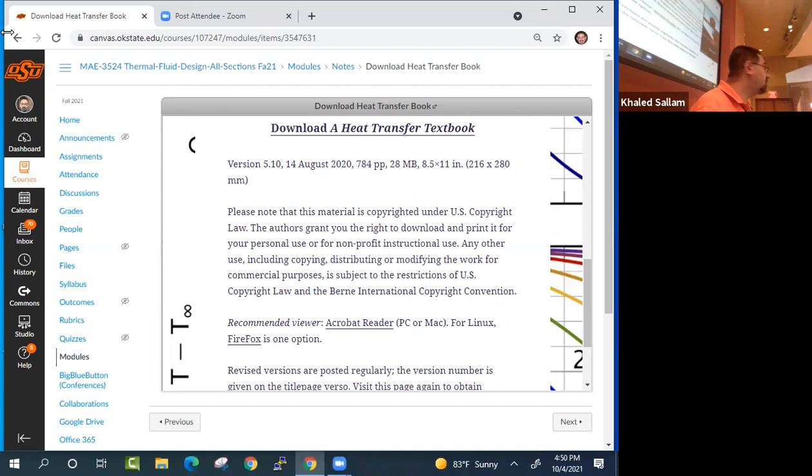If you just click here, you can download the whole book. It's an excellent book, but we only need chapter 3, which is heat exchanger design. And on top of the actual textbook, they have the solutions to all 43 problems in chapter 3, the heat exchanger chapter, all uploaded for you.

So between this and the PowerPoint, which is mainly based on Dr. Ghajar's book, the one you got in heat transfer, by Dr. Afshin Ghajar, correct? Between those 3 things, we are in good shape. You don't really need any heat transfer book. Does this make sense? Yes.

So let's start with the introduction to heat transfer. Okay, so that would be chapter 1 and 2 in this book, chapter 1 and 2 in the MIT book, and basically the first 9 chapters in the heat transfer book. So the whole 9 chapters in the heat transfer book are really an introduction for how to pick a heat exchanger.

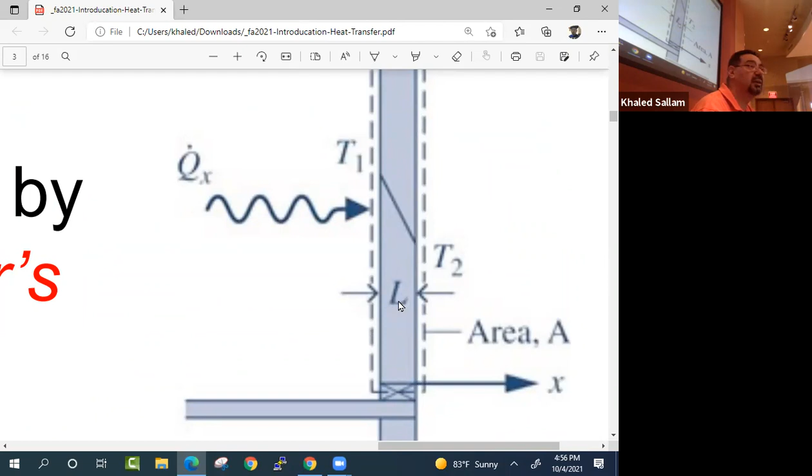It basically follows Fourier's law, which says that the heat flux is a function of the temperature gradient, so it's delta T over L. That's Fourier's law. When the wall is flat, there is one form. When the wall is cylindrical, like a cylinder pipe, it's another. When it's spherical, like a spherical shell tank, it's another one.

So the bottom line for conduction is Fourier's law: Q dot, in joules per second, is minus K A partial T partial X. And why the minus? Anyone? Why does Fourier's law have a minus sign?

So Q dot is minus K A partial T partial X. What does this minus signify? Can K become negative? Can K become negative, or is it always positive? Conductivity, K is conductivity, always positive. And the area is always positive.

So can Q be positive or negative, or both? Yeah, it depends on the direction. If it's leaving the control volume, it's negative. When you are adding, it's positive. So Q dot can be plus or minus, and the sign of Q dot depends on the sign of partial T, partial X. That minus tells you that they are opposite to each other.

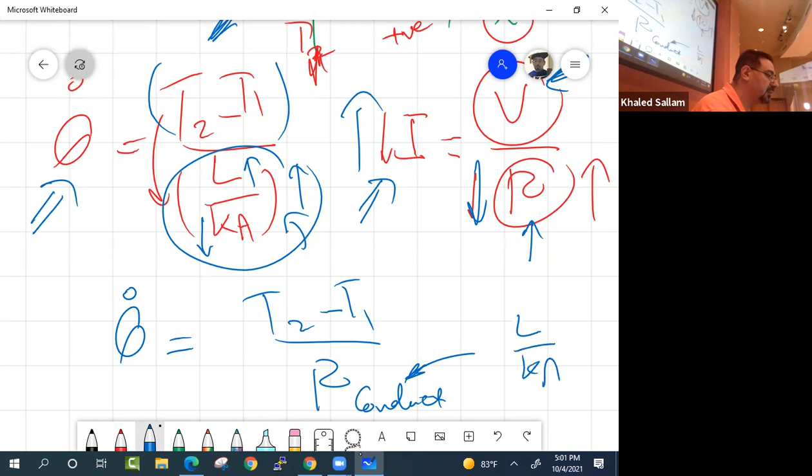So this is really our R. The heat transfer by conduction is simply now Q is the temperature difference, T2 minus T1, divided by R conduction. What's our R conduction? That is basically your L over KA. Okay, so that is pretty easy, right? That is what's shown here in this slide. So I is voltage over R, same thing - Q is delta T over R. And what's our R? It's L over KA.

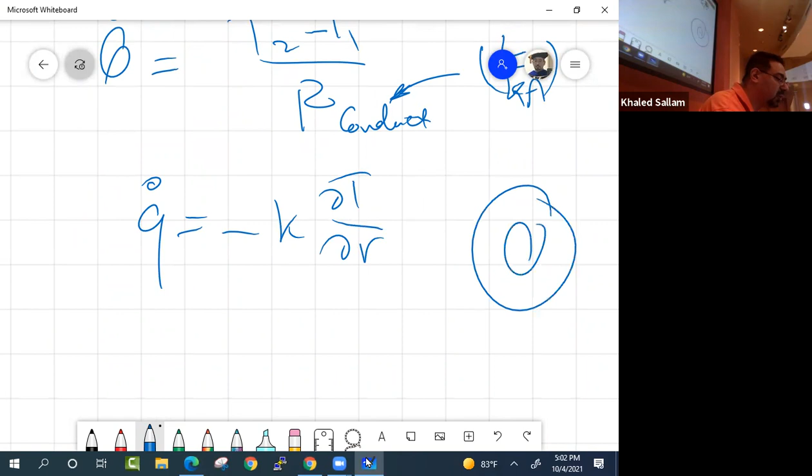So now if this was not a flat plate but a cylinder, does Fourier's law still hold? The Q dot per unit area is minus K partial T partial R this time, in cylindrical coordinates. And if you want the actual Q, you'd say minus K times A, partial T partial R. And of course, what is the area for heat transfer?

If this was a long cylinder, with hot oil at T1 inside and T2 outside, what would be the area for heat transfer? Is it pi over 4 times d-out squared minus d-in squared? Is that the area for heat transfer?

No, it's not. The heat transfer happens along the length of the pipe. That's the area for heat transfer, especially if the pipe is really long—the ends don't even matter. It's basically that area should be 2 pi R L, circumference times length.

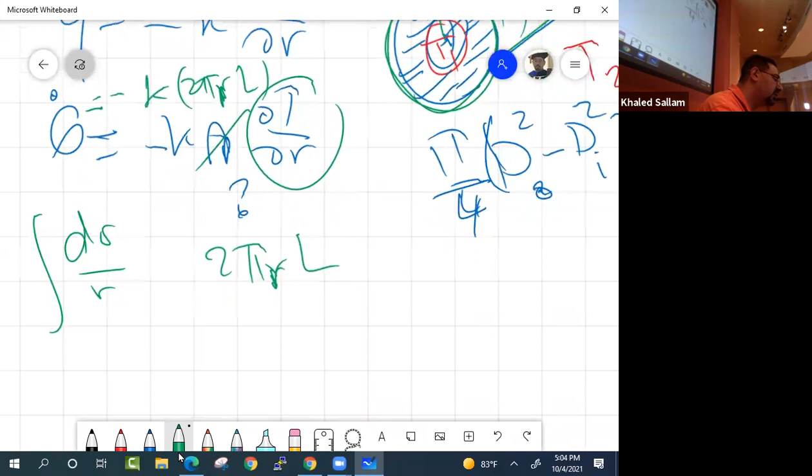So if you write K times 2 pi R L, then this L, this R, and partial T partial R complicate the integration a little bit to get Q. You're going to integrate dr over R. What's the integration of dr over R? What's the integration of dx over x?

Yes, it will be ln x, right? Or ln R, since we're doing R. It's going to be ln R, from R1 to R2, so you end up with ln R2 minus ln R1. And you remember ln minus ln is actually ln of R2 over R1. So then it makes sense

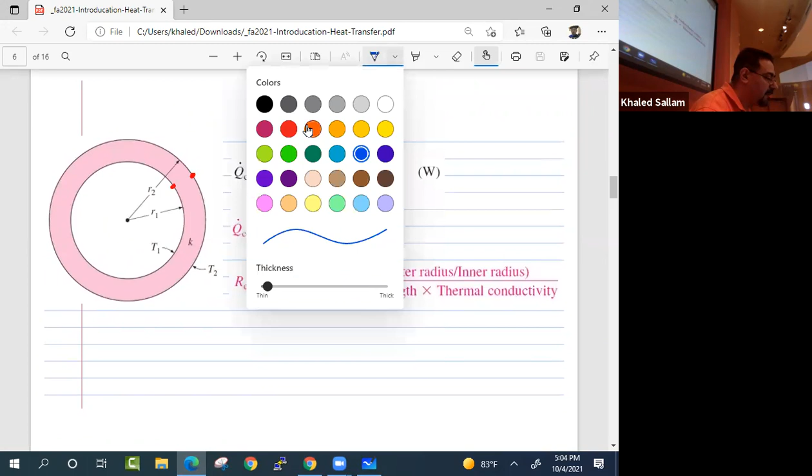that you end up with, fortunately, the same format: Q is still delta T over R. That's what's nice about conduction—plane wall, cylindrical wall, spherical wall, it's always delta T over a resistance. But the resistance shape changes. So for cylindrical, it's ln(R2/R1) divided by 2 pi L K.

That is the resistance of a cylindrical shell, right? It's like the foam that we buy for our HVAC pipe leaving your house, going into the outside unit—there are pipes. And this pipe, you have to seal it. You buy those foam things from Lowe's and you seal it.

And then what we put at the end, I didn't do last time. After it lasted like 5 years or something, the pipes start to, the foam starts to die basically, or break. Why? What is the part that I didn't do? I was taking care of the conduction, but I didn't take care of what else you should recommend putting on your pipe, besides that foam thing. What else do you need to do?

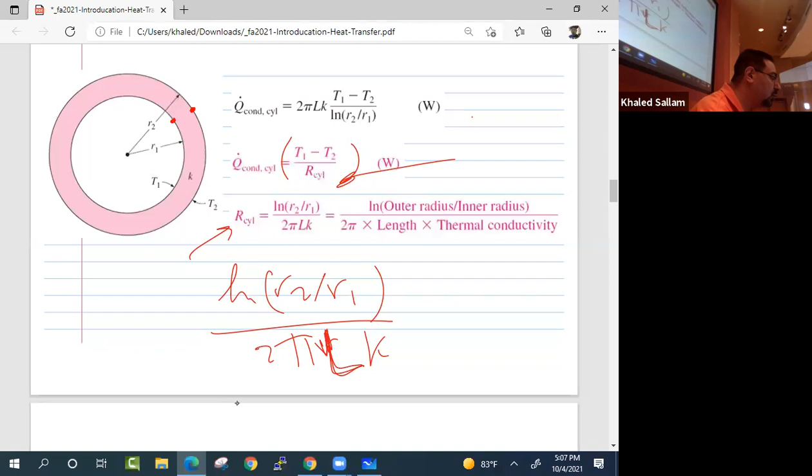Nice. Okay, so for cylindrical conduction, Q is delta T over R. What is R? ln(R2/R1) over 2 pi L K.

I'm not showing the spherical case, but you can go to your heat transfer book or the book I uploaded to see the resistance for a spherical tank or shell. You may think, who cares about spherical, who would make a spherical shape? But they do in natural gas—ships that carry liquefied natural gas usually have it in spherical tanks. Also, high pressure tanks are sometimes much easier to build in spherical shape because they take a lot more pressure compared to cylindrical. But anyway, let's get to heat exchangers—that's why we care about cylindrical geometry.

So now, what is conduction versus convection? Conduction is molecules vibrating—I'm next to you, when you vibrate, I vibrate next to you, and how much I vibrate compared to you depends on the R between us. So conduction requires contact; the molecules need to be sitting next to each other. Convection is basically when the fluid transferring the heat is free to move. When you put something hot on a surface, like a piece of metal, guess what happens to the air next to it?

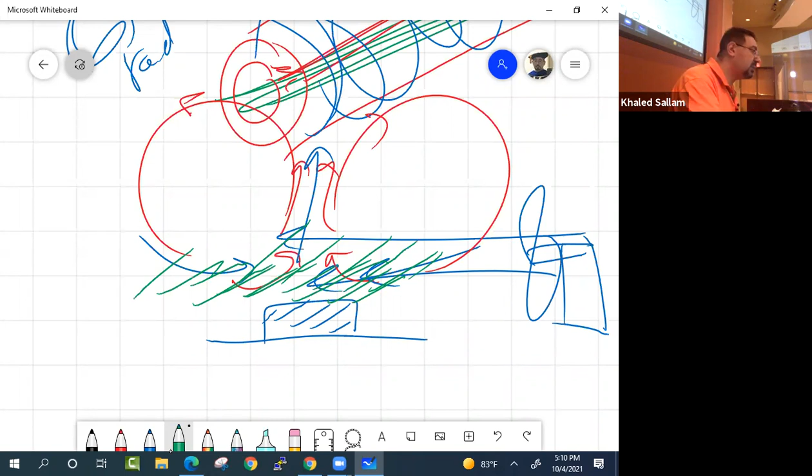You do this, right? So you're turning natural convection to forced convection. That's basically as if you are putting a fan, and that's why, because the rate by which things are moving is still slow. You want to be completely covering that piece of metal you're trying to cool with always fresh charge. You don't want the air to get hot, because when the air gets hot next to it, it prevents more cooling. If the air next to the piece is hot, why would the piece move heat to it? But if you put cold air always, all the time, next to that piece of metal, it will always send the heat transfer out. So this would be forced convection.

And there is natural convection, and sometimes we use both of them. So where do we use natural convection in our house for cooling?

In our big flat TV. If you open your flat TV, you will see that at the back they have a heat sink, and that heat sink basically has fins like this. Those fins should be vertical or horizontal. Vertical, excellent, so that the air has a chance to get hot and leave. If they are horizontal, then they will trap the air in the middle. But it's basically continuously cooling you. And why is it natural convection? Because you want it to be a quiet and pleasant experience watching the TV.

But the Xbox, is it natural convection or forced convection? Forced convection, right? Because it's so much energy and you cannot wait. So they just basically have to use a fan.

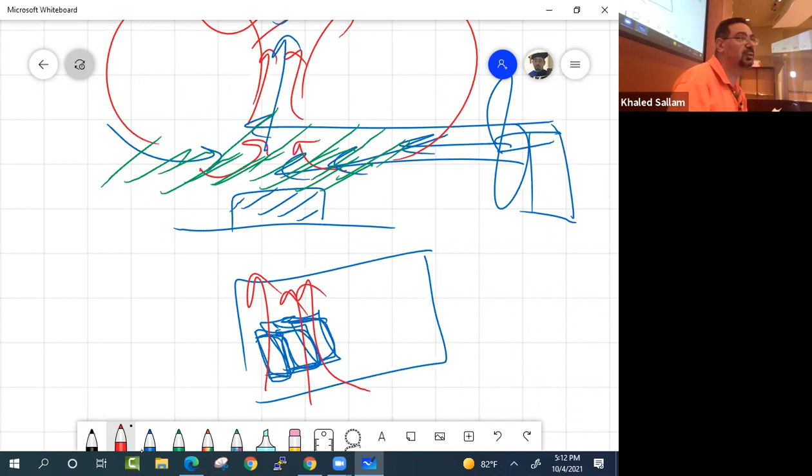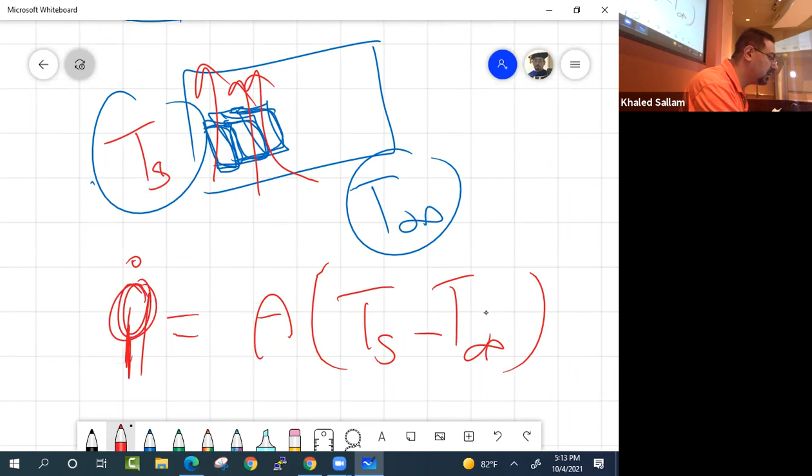Very good. So the convection happened, the heat transfer happened, because it's still the same thing: you got a hot surface and hopefully a cold ambient. The difference between those two makes the heat transfer happen. So the Q dot is proportional to Ts minus T infinity, and of course it would depend on the area. So let's put the Q dot, not the specific one - the joule per second, not the joule per second per meter square.

The constant of proportionality will depend on how easy the air is moving through those things. It depends on the geometry, it depends on the speed - is it moving quickly or slowly? What kind of fluid is it? Does it have a big Cp, can it take a lot of joules, or do you throw 2 joules on it and its temperature rises so much? So all those things we lump down into something called H, heat transfer coefficient.

So writing this equation doesn't mean we know the heat transfer. Actually, we don't. Unlike conduction, when we say Q dot by conduction is minus K times A times partial T partial X, we got it - we know the K, we know the area, we know the temperature gradient. But when we write convection like this, it's like rephrasing the question. Basically you're saying we will know the Q - but the question was, what is the Q? Now we just said, well, what is the H?

And there are a bunch of equations that will give you that H in terms of the speed of the air and the mechanism - is it natural convection or forced convection, forced convection on a pipe, or forced convection inside the pipe. That's why there are maybe 3 or 4 chapters on convection in the heat transfer book - maybe one introduction and one on internal flow. I didn't teach heat transfer since 2014, so I don't really remember that. But I remember chapter 10, which is what we are here for.

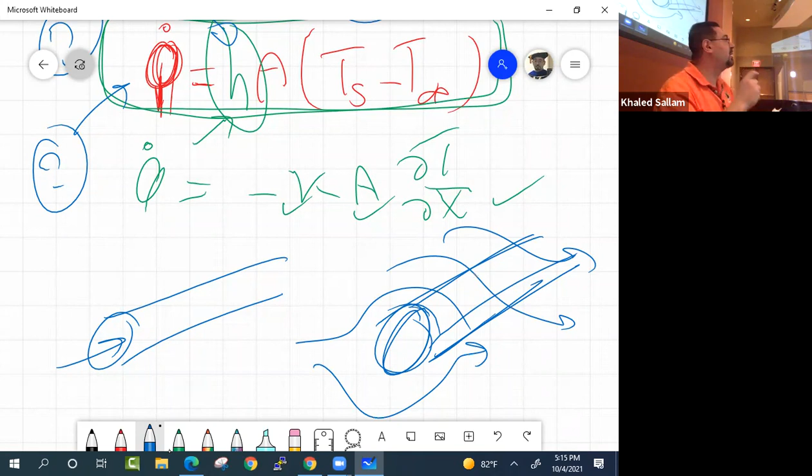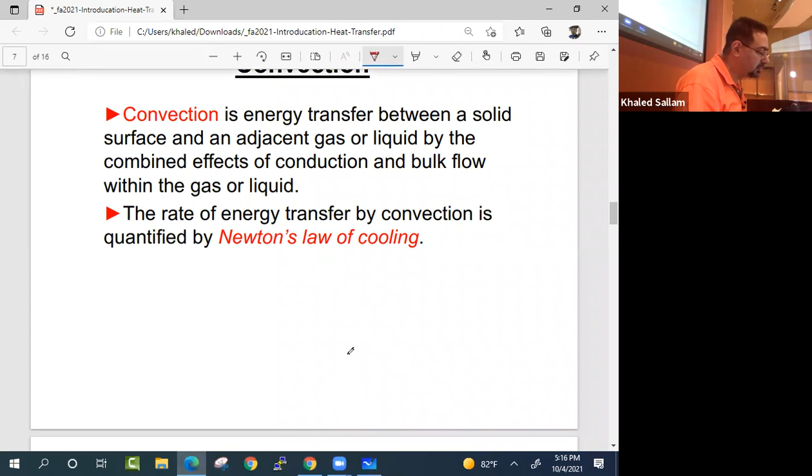You'll be able to base your calculation on where it should go. So again, convection is all about this H. Q via convection is the holy grail of convection - how we can calculate that H. There are graduate students that spend 4 years of their life for the PhD on this.

I have one right now working on the heat transfer convection coefficient for a new kind of boiling, trying to make boiling from the floor so efficient. He's trying to calculate this new H, building an experimental setup so he can measure it, then put it in a graph, and that graph generates a formula. That formula will then be used by people using that configuration.

So there are so many H values for so many configurations, done by so many people. In general, the H for water flow is very high, but the H for airflow is very low - air is not good at moving convection. So how can we help Q get higher?

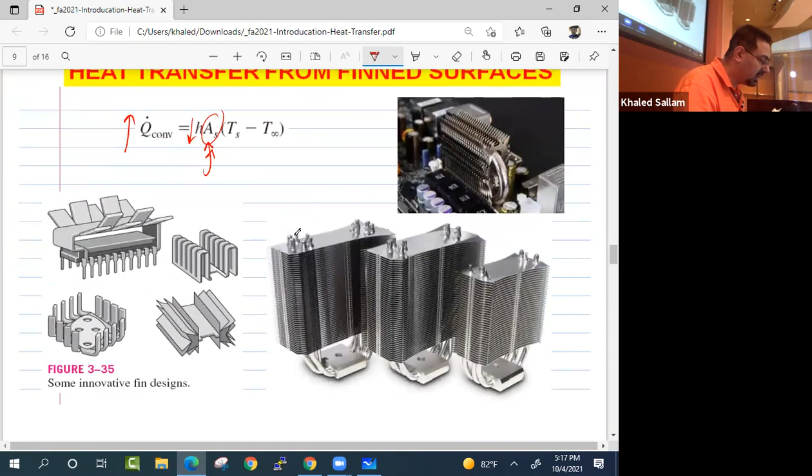Fins, right? What do fins do? They increase your surface area S. So when the pipe has only this much surface, you bring in so many additional areas - that's how you get your Q to be high. Make sense?

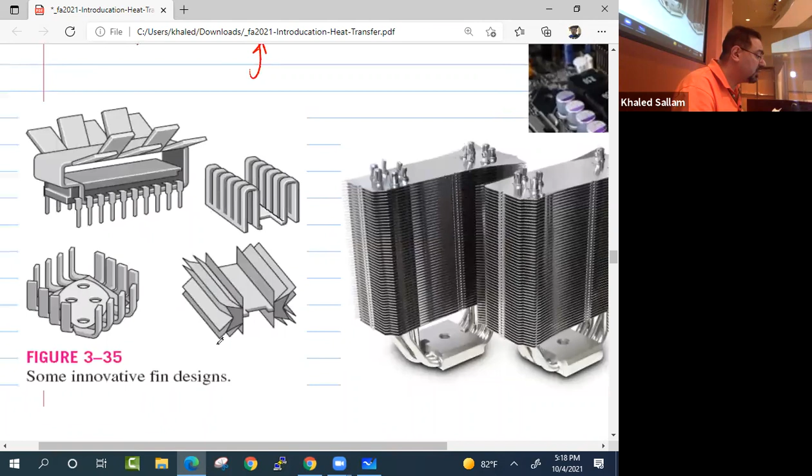So the shape of the fins and their orientation should allow air to go through, and they shouldn't compete with each other. They should also have efficient surface area - meaning if I have a chip on a motherboard, should I make my fin that tall, or should I instead make a few shorter ones, or one long one with the same area versus four shorter ones with the same area?

What would be a better design? Because that part, when it's close like at the base, is probably at the same surface temperature TS as near the wall. But as it gets farther away and gets cooled by the air, it becomes colder to the extent that that part is as if it's sitting at T-infinity. The farther away you are from the wall, the cooler you are.

So then all this area becomes useless. What's the point of having a surface at the same temperature as the air? You want surface that's at the same temperature as the base surface, so that you really increase the effective surface area.

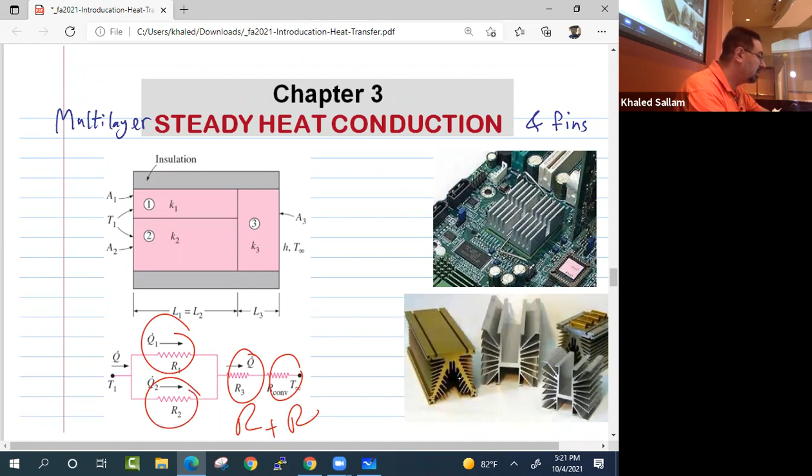So chapter 3 was multi-layer. What was multi-layer? Sometimes it's one layer moving to another, like the envelope of our buildings - you've got the brick, the insulation, the stone wall on the outside. So what you do is, if they're in series, we just add them, R plus R. And when they're in parallel, we add them as 1 over R plus 1 over R, which gives 1 over R total.

So when are things in series? The flux needs to go from this one to this one to this one. When they are parallel, that means the flux can split through them, right?

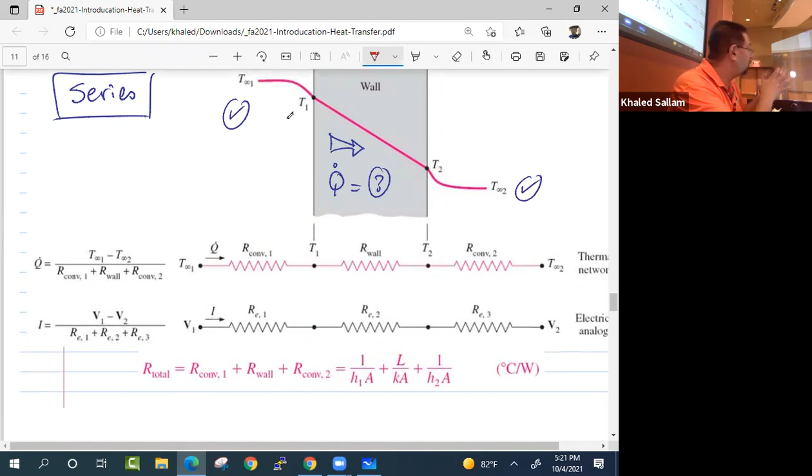So here is an example of things in series: 1, 2, 3. Notice that 1 and 3 are actually convection. The heat transfer by convection is one of those resistances, like the air convecting to the wall, and then the wall has internal conduction, and then convection again. So when you add those, because they are all in series, it's basically R1 plus R2 plus R3, R convection plus R wall plus R convection, right?

And we talked about R conduction before, right? We said it was L over KA, okay? How did he derive this? Because he said Q dot was KA times (T minus T) over L. So when you bring this and put it down there, this becomes your R.

Similarly, that's what you can do with convection. What is Q convection? H A times T infinity minus TS, depending on which one is hotter. So you can take this and put it down there as 1 over HA. This becomes your R convection.

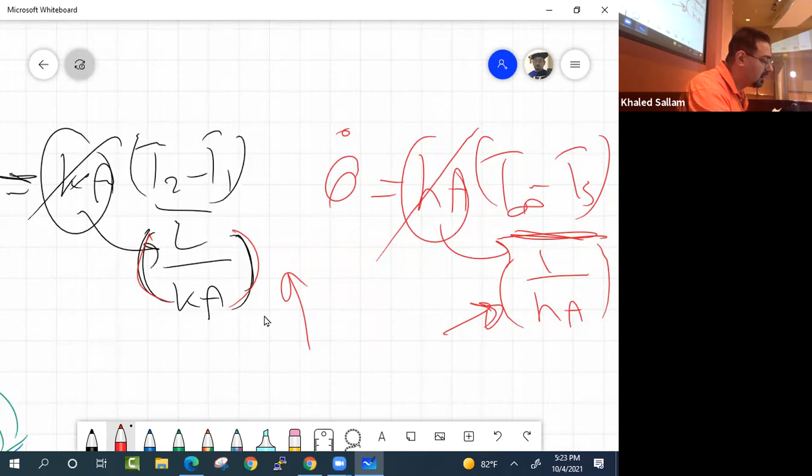So our conduction R is L over KA, and our convection is 1 over HA. Make sense? So you can see 1 over HA, that's convection, 1 over HA, that's convection, and L over KA, that's conduction. And this is adding the three of them together. Questions?

Okay, and for a cylinder, you still can have convection on the inside and convection on the outside. That's internal forced convection, and outside could be external forced convection or external natural convection. Like if the pipe is left basically without air flow on it, just buoyancy and stuff. So you add 1 plus 2 plus 3, right?

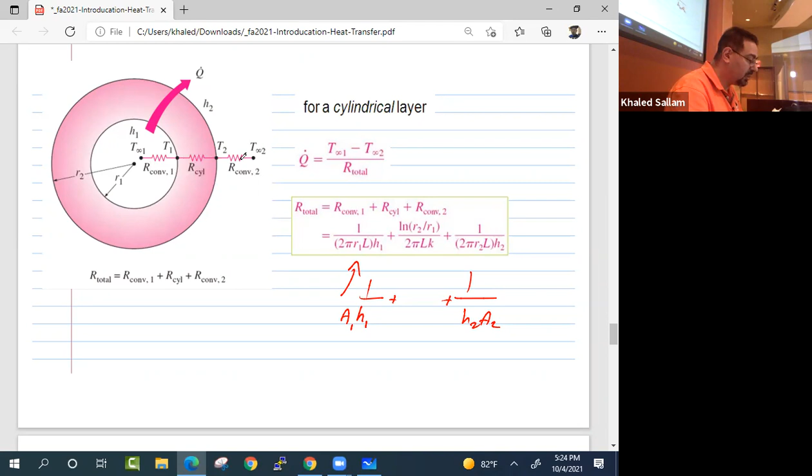Here is 1 over HA. Notice that the area of the cylinder - that's a common mistake. We always think, well, pi over 4 D squared. No, it's not, it's a cylinder. The area is 2 pi R L. That is the area for the heat transfer, 2 pi R L.

Okay, and we talked about cylinder conduction. Then it's ln(R2 over R1) over 2 pi L K.

Okay, and then chapter 4, that was the unsteady heat transfer by conduction. So what did we call this equation? Does anyone remember? We used to call it the general equation of conduction, but when you look at it, it's really nothing but the first law of thermodynamics, written for conduction.

So what would be the first law of thermodynamics? Q minus W equals M dot delta H, right? That's what this exam today is about, by the way. First law of thermodynamics, Q minus W equal M dot delta H. As a matter of fact, if there is any problem that looks weird to you, just try M dot delta H, and then assign it to something, Q or W. Everything is M dot delta H in the first law, right?

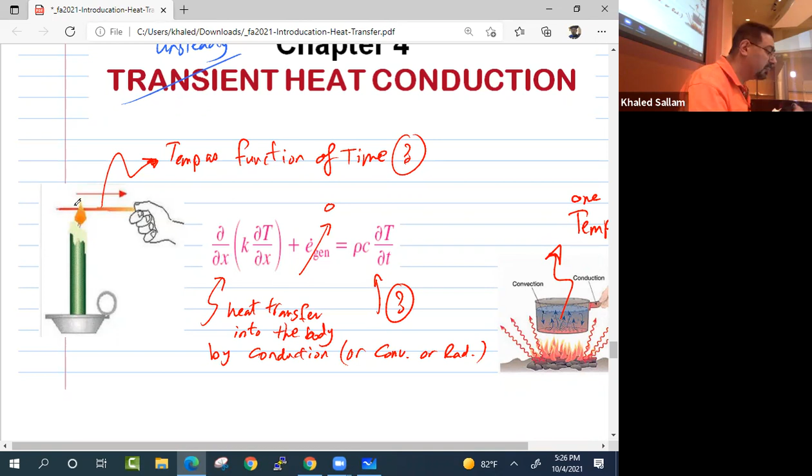So what is the Q dot? Q dot coming by conduction according to Fourier's law, and if there is inside heat generation - maybe that's an electric wire and you generate heat from inside, okay, that makes it hotter. Or maybe it's a nuclear fuel rod and there's nuclear reaction happening inside, right?

So in nuclear fuel rods, they will be like this, and inside there is uranium-235, and then it's surrounded by water everywhere, swimming in water basically. And so there is radiation, there is fission that happens inside, and that generates E dot inside, watts per meter cubed, right?

And then you are basically trying to cool it from the outside. So that is a scenario where this E dot inside will actually exist. Inside the rod itself, inside the thing that you're studying for heat transfer, it's generating its own heat.

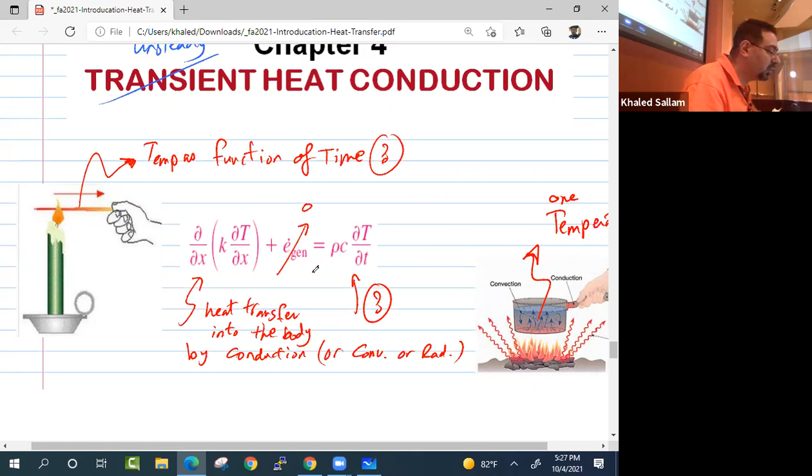Okay. And so the purpose behind that chapter was to calculate the partial T, the temperature change with time. So basically this equation says that if you give me heat transfer, I'm going to take my temperature and go up, like a bunch of water sitting in a pot and you are heating it, sending Q by conduction to the wall, to them, right?

And if that energy is coming not by conduction but by convection, fine. The Q dot again is the first law: Q dot minus W dot equals the change in energy inside the control volume. So there is no work, but the Q that's coming could also come by heat transfer, H A delta T. Like food, you take it out of the fridge and it's basically getting heat from the room, or food you are putting inside the fridge or freezer, trying to figure out how quickly it will solidify. That would be something like this.

And so there were charts that will solve those things when you make an ideal geometry. Like you would say, I'm going to simulate this as a perfect sphere, a perfect cylinder, or a perfect slab, and then you'll be able to check how quickly the temperature inside will drop. You remember those charts that have the Biot number in it? It basically lets you track with time how quickly the temperature will move.

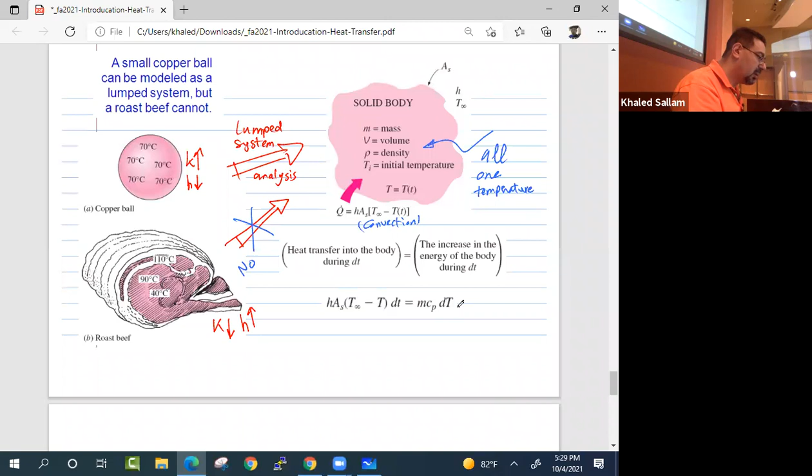So fortunately, we will deal with steady state in this course. But it's nice to remember how we did the unsteady part.

Radiation really makes sense, or it's very important, when temperature is really high, like flames. When you're studying the radiation from a flame, a campfire, or a fire accident, if there is a fire in the corner, it will actually move to the whole auditorium not by convection of hot air, but just by radiation. If the fire is at the corner, that bench will catch fire just because it sees the fire in front of it. This is especially true if the flame is sooting, making black particles, which radiate like crazy - they are very good emitters of radiation. So a sooting flame will send energy to different places rather than waiting for convection to heat the ceiling until it catches fire.

There are people who really work on investigating fire accidents for insurance. They go to the place and can see where the fire started, and when and how.

So the mechanism for radiation, or the way to model radiation, is this equation: sigma A times T to the power 4 minus T to the power 4. That's why when the temperature goes up, T to the power 4 becomes so big, and the radiation dominates. And sigma is the Stefan-Boltzmann constant, the best constant in the whole universe.

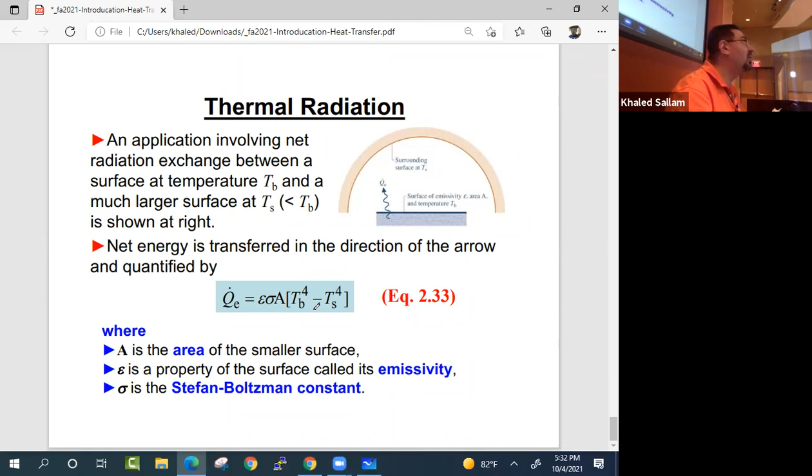So what is epsilon sitting over here? You radiate with sigma T to the power 4 if you are a black body, but we are not black bodies, we are gray bodies. Because of this, we radiate with a ratio of that black body radiation. So epsilon is basically our emissivity, how far you are from a perfect radiating black body.

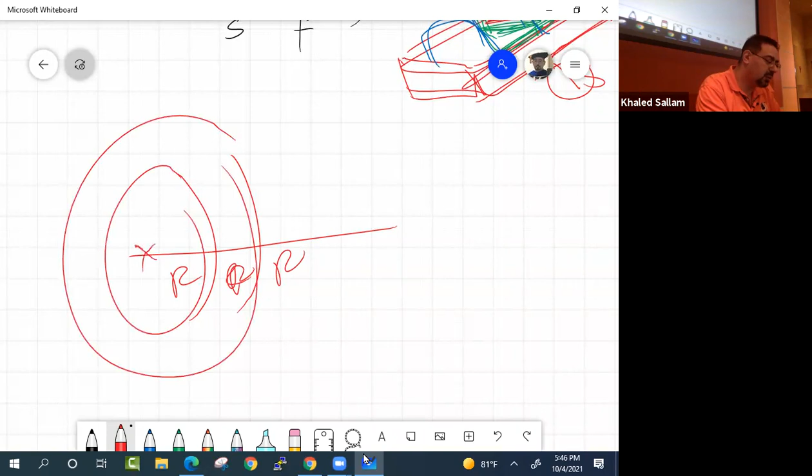As we said, the whole heat transfer course was about finding the resistance for heat transfer - basically how to control the heat transfer from a hot fluid inside to the ambient, or seawater outside. Maybe this is a crude oil pipeline going under the Gulf of Mexico, or a steam plant pipeline taking steam from one place to another. So it was all about this Q dot, which is T1 minus T2, T1 being temperature here, T2 being temperature here, over a bunch of R's: 1 over HA plus ln(R2 over R1) over 2 pi K L, plus 1 over HA.

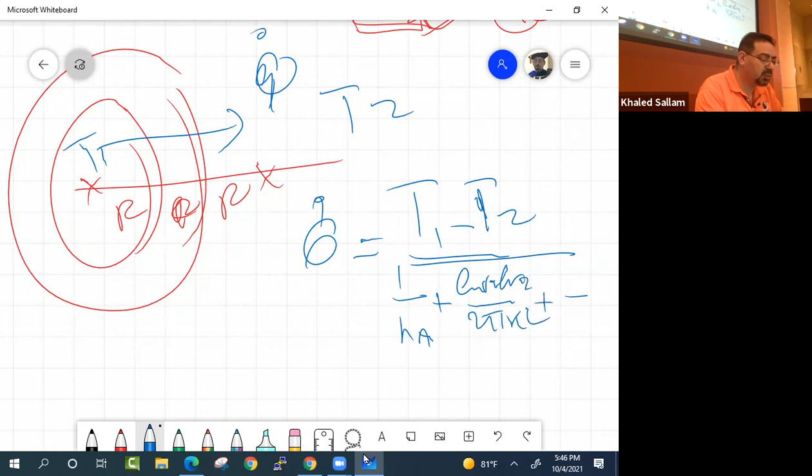Bunch of resistance. Or we can simply say T1 minus T2 over the whole big resistance. Let's call it 1 over UA. What's 1 over UA? Just like H was the heat transfer by convection, U is the overall heat transfer coefficient. So you multiply this by the area out, and that will be U out.

And so now Q dot equals U naught, area naught, T1 minus T2. Area naught being the outside pipe area, and U naught the overall heat transfer coefficient. This is the equation of the heat transfer book. If there is one equation that you need to remember, it was this. This equation is really important because it tells us when we are designing the cycle, whether it's mechanical vapor compression or Rankine cycle, Watt cycle, that you need a certain temperature gradient. And if that temperature gradient is too small, then you have to compensate with a really big area. But if you make the temperature difference big, then the area for heat transfer doesn't have to be that big for the same Q dot.

So I have a friend that worked making HVAC systems for big commercial buses. The customer would come and say, design the system for a delta T of 2 degrees. And he would ask why, because this would require a huge heat exchanger. You guys don't really have only a 2 degree temperature difference, you can afford to make it a little bit bigger. So the design would be common, but they were trying to oversize the system so that their Q is really big even with a very small temperature difference.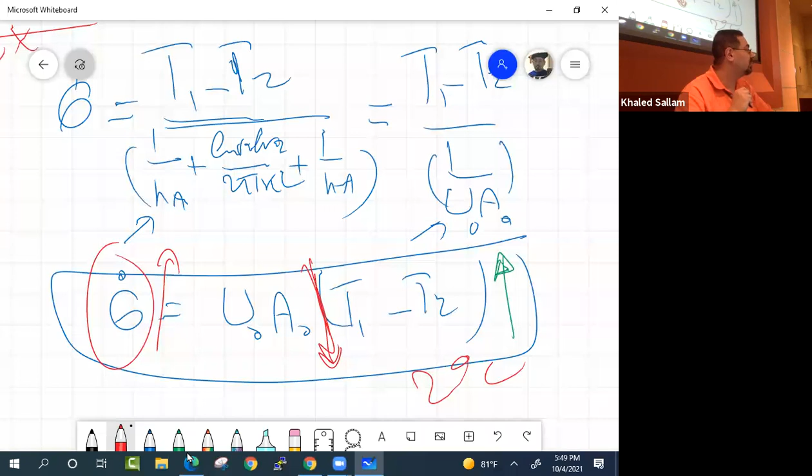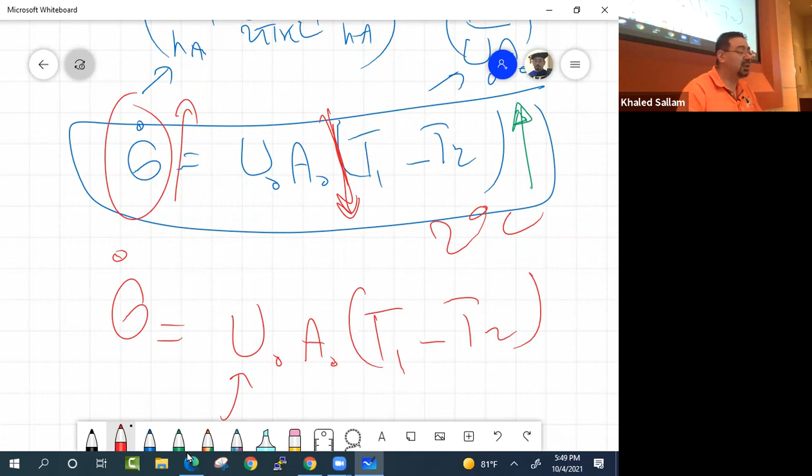But that is the significance of this equation. And of course, one could say it's not just T and area in the equation, there is also U. And yes, people try to help the U, try to make it bigger by making the water move faster, by trying to make the water become turbulent. Inside the pipe, they have something called a turbulator. They put inserts that if you come to my office upstairs you will see, so that the water or fluid will basically have to go back and forth, hitting the wall.

That helps the U. They also make heat exchangers that look like this, where the pipe or plates for the hot fluid are already corrugated. Why? So the fluid hits the wall, hits the wall, hits the wall. So all of this is trying to improve your U. But really, at the end of the day, there's nothing much you can do to change the U. You're going to use just the best state of the art U, but it's really the area and the delta T that carry the day.

I know at least 3 students that work in heat transfer. After they graduated from here, they work for a heat transfer company in Tulsa that makes huge heat exchangers for a lot of countries. Since they graduated, we took some students and visited them a few years ago, and that's where I met them. Their life is basically this equation, that's their career now. But of course, how to get the U, how to make the right type, we will see what the types of heat exchangers are. This equation could be the career of some of you, for example if you end up working here in Tulsa, we are really lucky, we have a lot of companies that just make heat exchangers for different applications.

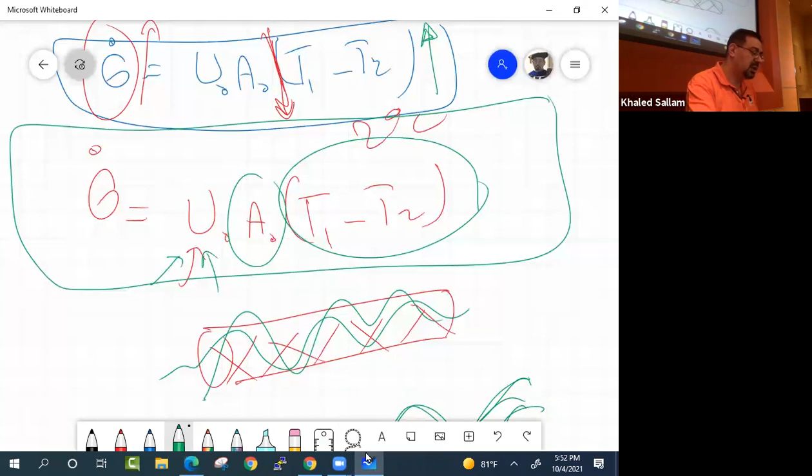So this was about the delta T. You would think delta T is easy to calculate, it means T hot minus T cold. Well, no, it's not that easy, because even for something like this, when a hot fluid is flowing into a pipe and there is air outside, that's not going to change. There's tons of air outside, so it's T infinity.

I'm plotting it as a function of X, as we move along X. But the fluid is doing that - it starts with T in and leaves with T out, and it's getting colder as it goes into this pipe.

And now you see the question, the problem. The problem is, which delta T should I use? Should I use Ti minus T infinity, or T out minus T infinity? Which one should we use? When I'm using it for this equation, Q dot equals UA delta T - delta T between what? Between the hot guy and the cold guy over here that's trying to cool him. Which one should I use?

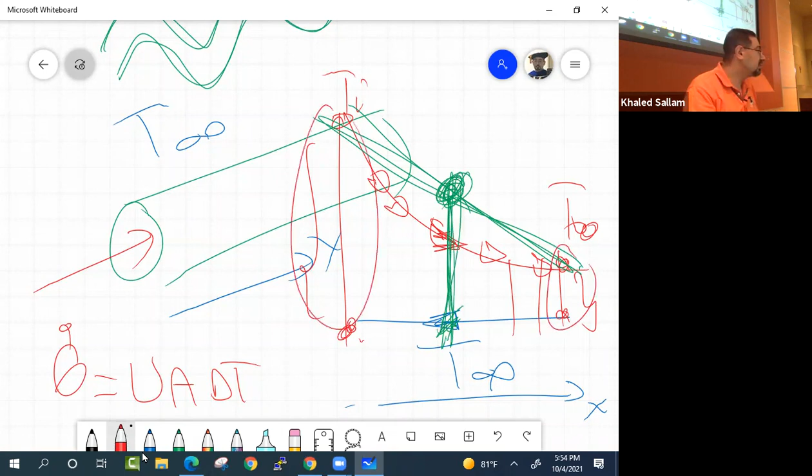Use the average, kind of - the average temperature would be T plus T over 2, minus this. This is actually a good approximation if the temperature difference between this and this is small. But if the difference is big, like in a long pipe, then the whole method of logarithmic mean temperature difference is needed to figure out what is a good delta T. That was basically what the whole thing is about - calculating the delta T.

The second method - personally, when I was a student taking a heat transfer course, I used to be scared of that method. The equation was so big it made you scared, but it's not that bad, it's actually very easy. And if the equation is complicated, so what? We are not going to use the equation ourselves. There's a MATLAB file that will use the equation for us - we just have to tell it what kind of exchanger, and go for it. We are not really going to use the actual formula ourselves.

There's also charts for it, and you can just read from the chart. So don't be like me, don't let the complexity of the equation, with its exponents and stuff, scare you. That method is called - anyone? - the effectiveness method. And it's all about this parameter called epsilon.

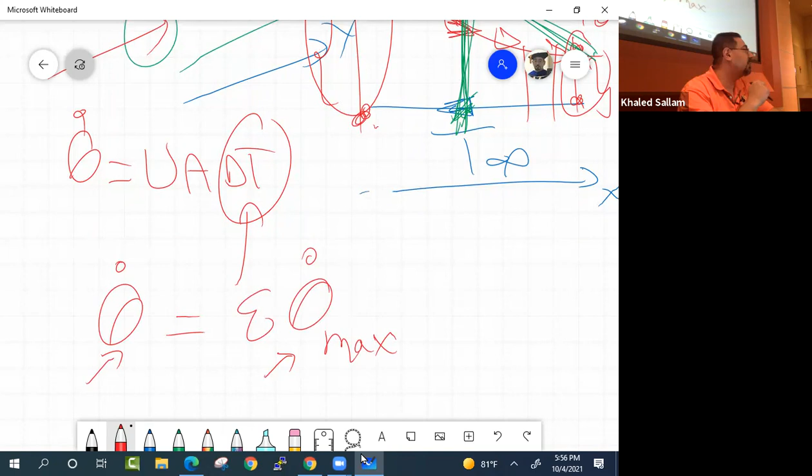That epsilon is the relation between the Q actual in your heat exchanger to the Q dot max. Epsilon is the effectiveness of the heat exchanger. If that heat exchanger is very effective, if it has an effectiveness of 1, then it made the dream happen. What's the dream? You get Q dot max.

And when you think about what the dream is, think about a heat exchanger like this, where TC in, and this is TC out, and this is T hot in, and this is T hot out. So the hot fluid is doing this while the cold fluid is doing this. Of course, the dream is, if you are designing a heat exchanger, to take that hot fluid coming in and cool it down all the way to TC in, or the other way, take that cold fluid and heat it up all the way to the inlet hot fluid temperature.

Or basically doing what? This is called delta T max - that's the largest temperature difference that exists in that heat exchanger, the difference between T hot in and TC in. If you manage to make one of those fluids, hot or cold, reach that maximum delta T, you are 100% effective. The heat exchanger can never ask for more than this.

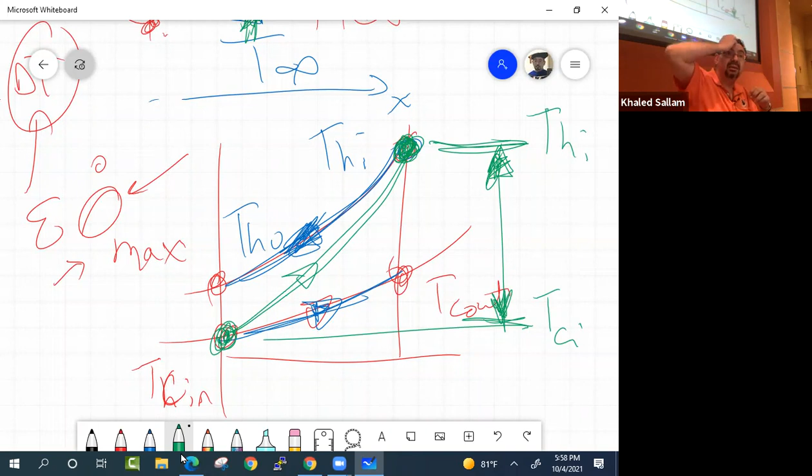And so the equation, of course, don't get me wrong, we are still in the whole idea behind this calculation to get Q dot max or calculate the area. Although this equation doesn't show where the area is, the area is embedded inside this effectiveness. That effectiveness has a lot of formulas, and that effectiveness is a function of UA over M dot CP. So if you know the effectiveness, you know the area, right? So both methods yield the same thing. Either give you the area if you know the Q, or give you the Q if you know the area.

We will see why we would prefer one over the other for certain problems.

So, logarithmic mean temperature difference and effectiveness. I'm doing this all from the heat exchanger chapter 11 from Dr. Cengel's book, the one you guys used in the heat transfer book. But that textbook I already pointed out, the free book from MIT, download the heat transfer book, and those 42 solved problems in heat exchanger are perfect. Those are all you need to understand heat exchanger design. So download those two if you don't have the book, and if you do have the book, then we are in good shape.

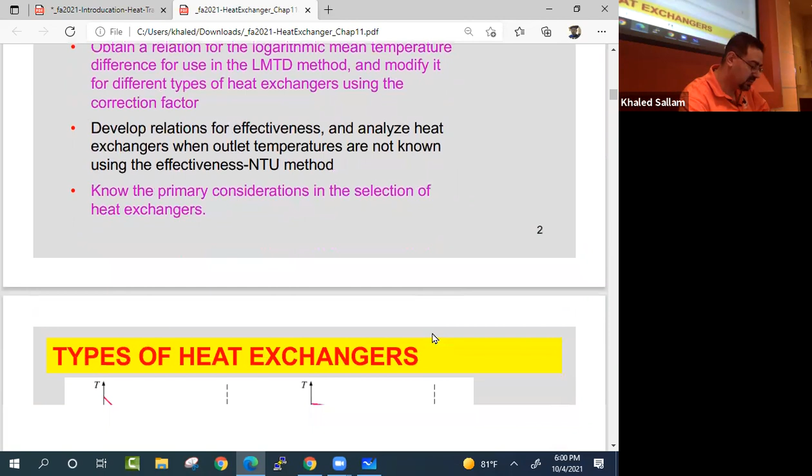So the objective is basically to figure out the performance of a heat exchanger, figuring out his Q dot actual, basically, or his area. Now there are two configurations, two fundamental configurations.

One of them is called parallel flow, where flow comes from one side and leaves together, parallel flow. And then there is counter flow. And it's very clear which one is better with relation to achieving the dream. What's the dream? Get the cold fluid all the way up to T hot in, or get the T hot in all the way to T cold in. Basically, make one of those two guys get delta T max on him. Which one is doing this?

The counter flow. So counter flow would be ideal compared to parallel flow, which is putting a cap on each other's dream. Basically, they have to meet kind of in the middle. So of course we would prefer counter flow, and we would always try to be, if not pure counter flow because of size limitation or geometry, then we will try to be as much as possible in counter flow configuration.

And from thermodynamics point of view, what I said is just the layman explanation why we like counter flow compared to parallel flow. But from thermodynamics, why is parallel flow horrible?

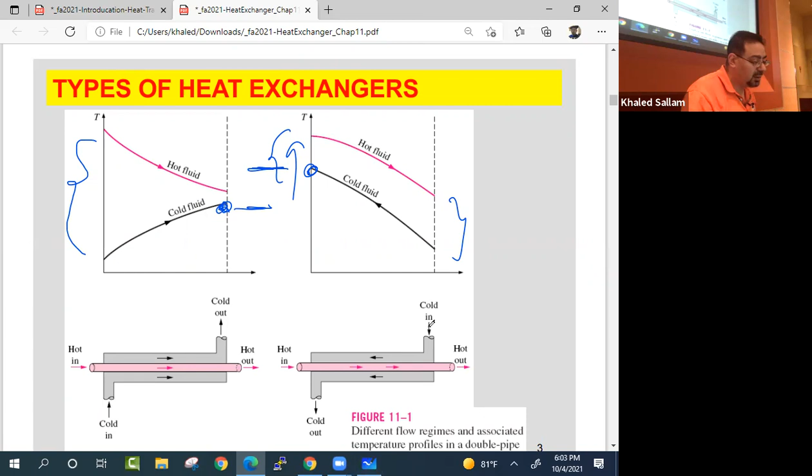Alright, so this is a very common geometry, right? Shell and tube. You can see how the steam is going in, or whatever the fluid is, in the shell type, and then the other fluid is moving in the tube. So this is the shell side and this is the tube side.

So you would love to have counter flow in a configuration like this. That's why, if you have a choice, you will send this guy this way while the other one will go this way. So this way they will be in almost counter flow.

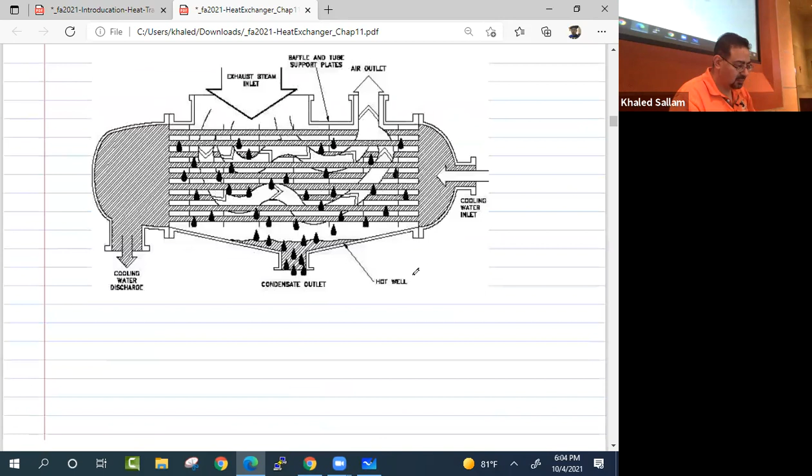There is also the choice of which fluid should be in which side. Usually the dirty fluid should be in the pipe side because it's easier to clean the inside of the pipe—you can send brushes and things to clean the tubes.

But cleaning from the outside, especially if it's a bundle of tubes, how could you reach and clean? Also, when it comes to condensation—if you're condensing steam, in the TS diagram we send the steam like this, and it condenses and becomes liquid while heating the other fluid from here to here. If you're going to condense steam and make droplets, it's much easier to condense on a tube rather than inside the tube.

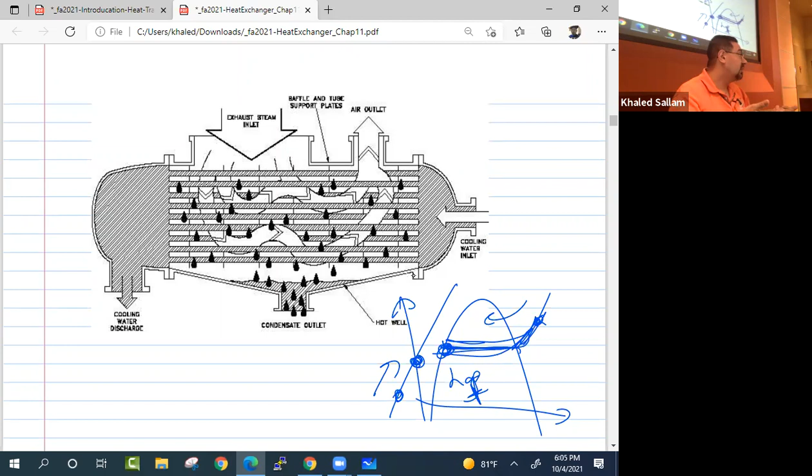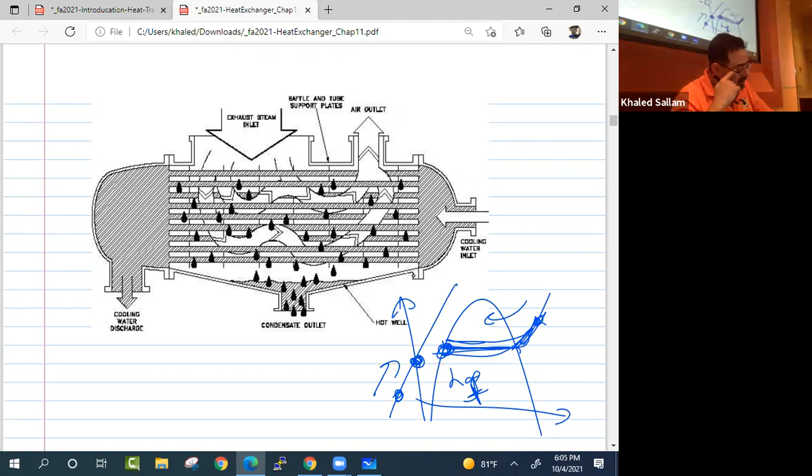Especially imagine if it's condensing in a horizontal tube—will that block the flow, or will we start having bubbles inside the liquid? That would be horrible. But condensing and letting droplets form on the tube and then fall down, that's a good plumbing technique—just let them rain on the pipes and drip to the floor. You see how the floor is sloped so the water can collect rather than sit in the corner.

Of course, there's also the arrangement of those tubes. If we look at how they are sitting, probably this configuration will be favorable over this one—if you set them like this, that's not a good idea, but if you let them get staggered like this, that is a good idea. Why? Because if we set them in rows, the flow condensing on the top one will drip onto the one below and isolate it from the rest of the steam—it will be covered by a blanket. So you want to stagger the pipes so they have a chance to meet the steam.

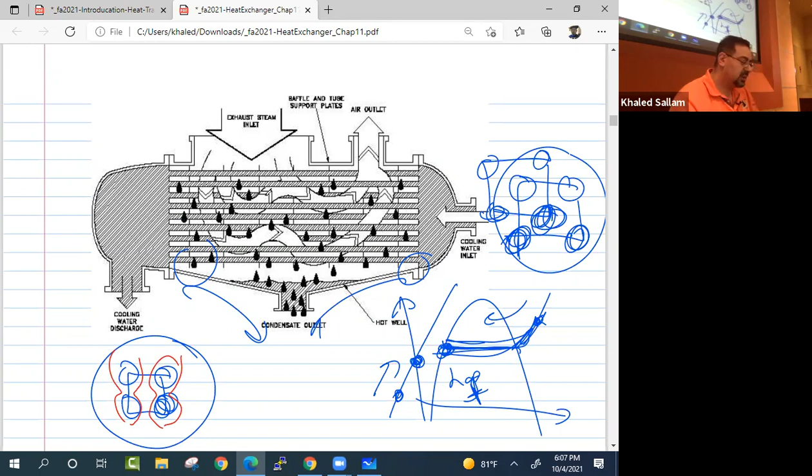So this is like one pass through—the pipe side just goes from one side to the other. But sometimes you don't have the luxury of plumbing to go from one place and leave from the other; maybe you have to go and come back from the same side of the wall because of space. So then the shell and tube side could have a configuration like this: one shell and two tube pass. So the shell side goes once and leaves, but the tube goes back and forth.

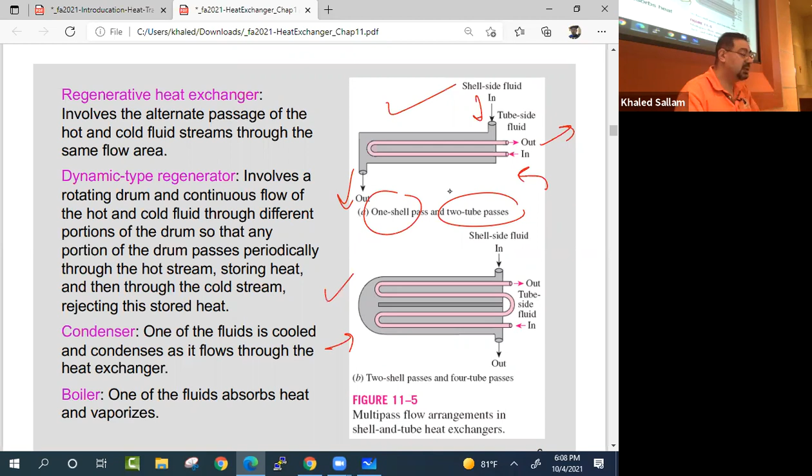And you can have it like this, two shell and four tube pass. It's important to distinguish between these, because there are charts for calculating the logarithmic mean temperature difference or the effectiveness, depending on which method you use. Those charts depend on whether you have 1 shell and 2 tube, 2 shell and 4 tube, 3 shell and 6 tube, or 4 shell—so you need to be able to distinguish which one it is in the drawing.

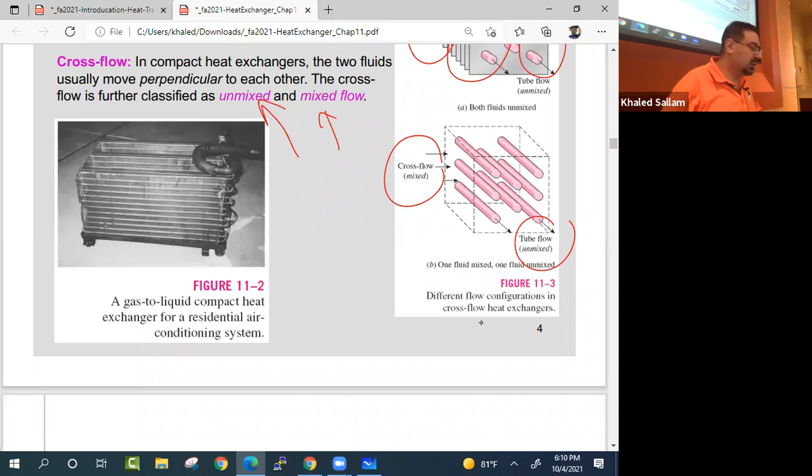And mixed or unmixed: if the flow is divided into small channels, small passes, then it's basically unmixed, like this. The tube side here is unmixed - every part of the fluid is moving in its own pipe. But the air is mixed, it's all going together, right? So again, you will use the right chart depending on the geometry.

And there are certain configurations that will look a little bit weird, and you really have to think carefully how you're gonna handle this. So for example, this wheel, rotating wheel - sometimes they call it an enthalpy wheel.

Okay, how does it work? This is happening in big HVAC systems. It also happens in every big power plant. Before the flow leaves the chimney, the last thing it sees before going to the stack and being thrown out, we send it into what they call, for a power plant, an air preheater. So the point is to heat the air coming into the furnace using the exhaust leaving the furnace.

Okay, so that wheel kind of rotates slowly, and when it's in the hot stream, it kind of gets heated, gets a little bit hot - it's continuously moving - and then once it's hot enough, it goes to the cold side and starts to cool down there. So it continuously moves the energy by capturing it in the material itself. It's a heat soaker, basically.

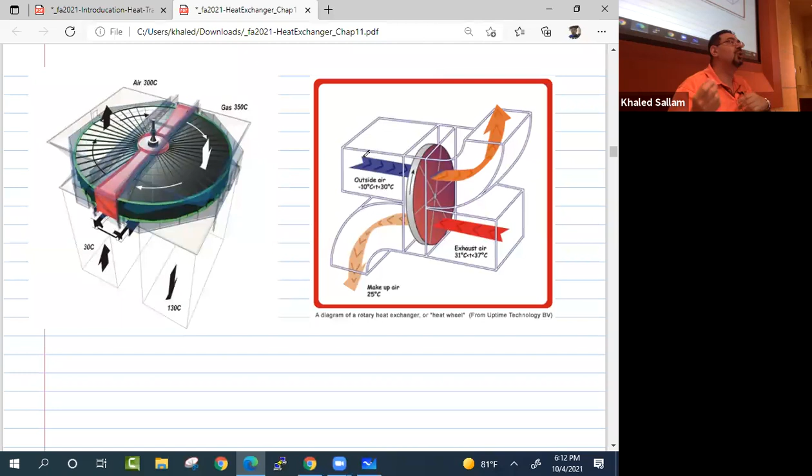And so in the HVAC system, that happens with the fresh air you are bringing in - usually really hot in the summer or very cold in the winter - and the exhaust that you are sending away. Say you are in a hospital and they ask you to throw away all the exhaust. You're like, man, but that exhaust is just air conditioned air, it's pretty good. But they have germs, or there's a regulation, you have to send that flow out. So in an attempt to capture some of those joules you worked so hard to create, you send the air into those kind of enthalpy wheels.

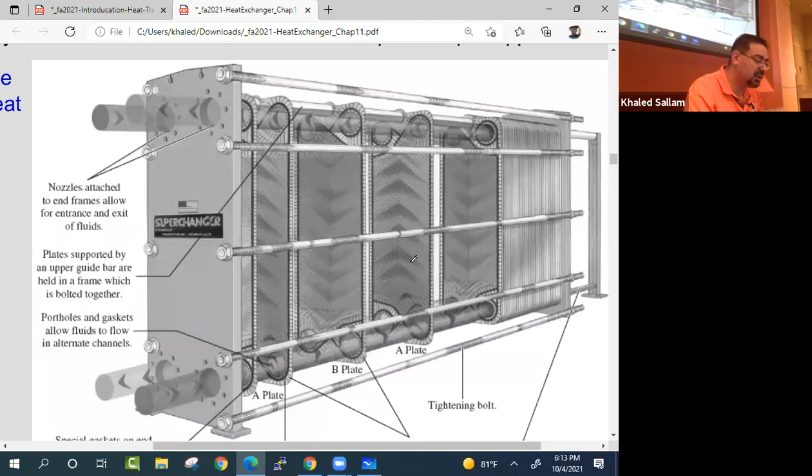So those plates, as you can see here, can stack a lot of them and make the hot fluid go into a bunch of those, while the cold fluid goes in the other side. And of course, you need efficient entrance and exit. But you can stack so much area in such a small plate, such a small space.

But what do you think is bad about those guys? What is that? The gasket - the seal that you are creating so that you can stack them. That gasket needs to be really very durable. It needs to have a very good lifespan so that it wouldn't leak the liquid, or the two fluids, right?

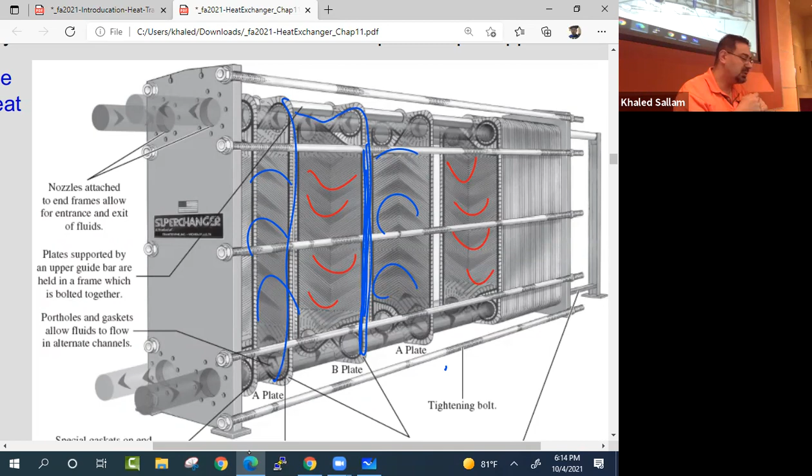So whatever the geometry, at the end of the day, there is a hot fluid and a cold fluid. And between those two guys, there is a bunch of resistance - a bunch of walls or convection. And the total R is adding all those guys up. And the total R will eventually become UA, so 1 over R is UA. So this is the equation, right?

And notice that you can define U based on the inside area, or you can define U based on the outside area, because at the end it's just like a resistance. So if you base it on the outside area, it's called U-out. If it's the inside area, it's U-in. At the end of the day, whenever they give you the area, they have to tell you - or whenever they give the U, they have to tell you what area they are based on. Or even better, sometimes they just give you UA together, and they tell you.

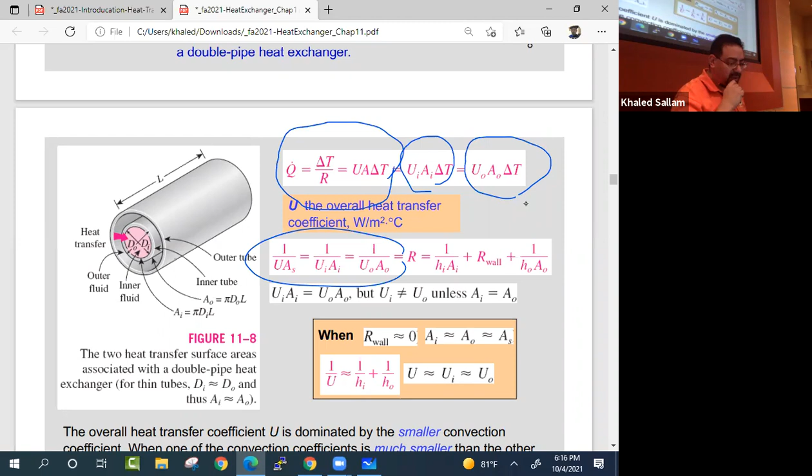So based on this, we were actually buying a bunch of heat exchangers recently for our research, and we went to McMaster-Carr. They ship everything so quickly. And you can see the heat exchanger, the shell and tube, and the plate heat exchanger.

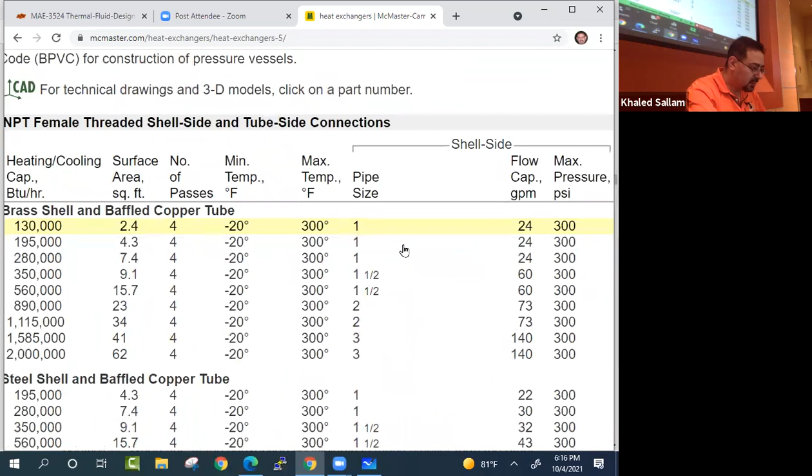So this is basically, you can see the prices are here, from 3,700 all the way down to 3,000. So if I want to buy this one for $3,000, that's a 2 million BTU per hour unit.

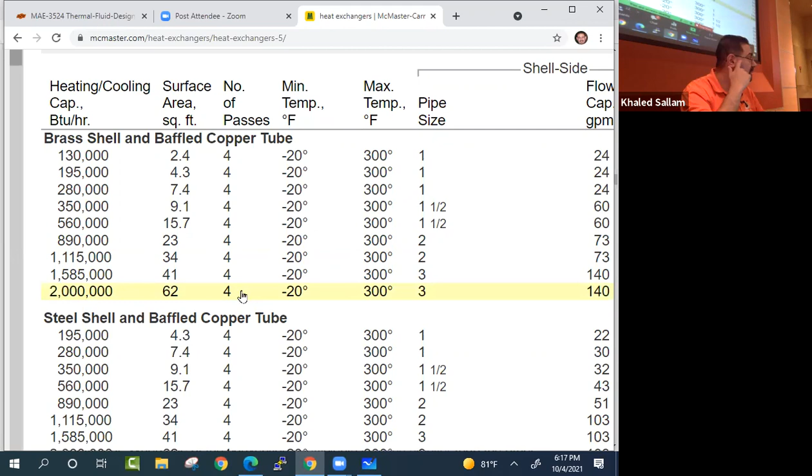But can I, based on what we said so far, think it's really 2 million BTU per hour out of this? If I buy this for my boss and give it to him, will I get 2 million BTU per hour, or will I get fired first?

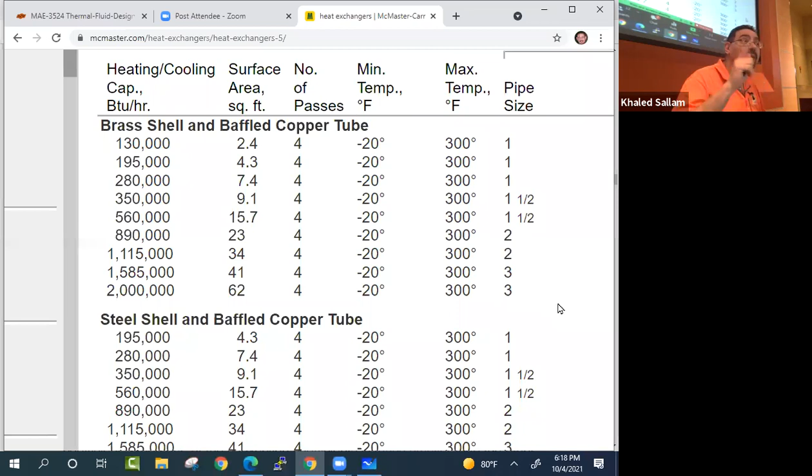Why do you think it will give you less? So what is the ideal? But how did they calculate this 2 million BTU per hour? Based on the minimum temperature and maximum temperature - so you cannot write the Q dot without knowing the delta T. You cannot tell me the Q dot is 2 million.

I mean, you can control the U and the A, of course. You control the area by the fact that here is the pipe that we send inside this thing. And you control the U by basically saying, well, this is the prescribed velocity. But this T, TH minus TC, this is what determines the Q dot. So now if you read the...

small print, you will be able to, at one point, they will tell you this Q is based on - if we click on the technical information, they will tell you we are basing this on a certain temperature. So they are using the cooling capacity based on cooling 180-degree Fahrenheit process water with 85-degree water.

So if you have that difference, if you have 100-degree Fahrenheit, we can give you the 2 million BTU per hour. But if you have only 5-degree or 10-degree, what will happen? So you give me the 100 here, I'm gonna give you the 2 million here. But you cut this to 10 degrees, and you're gonna cut this by 10 too, right? It's gonna drop to 200,000. So you will end up with 200,000.

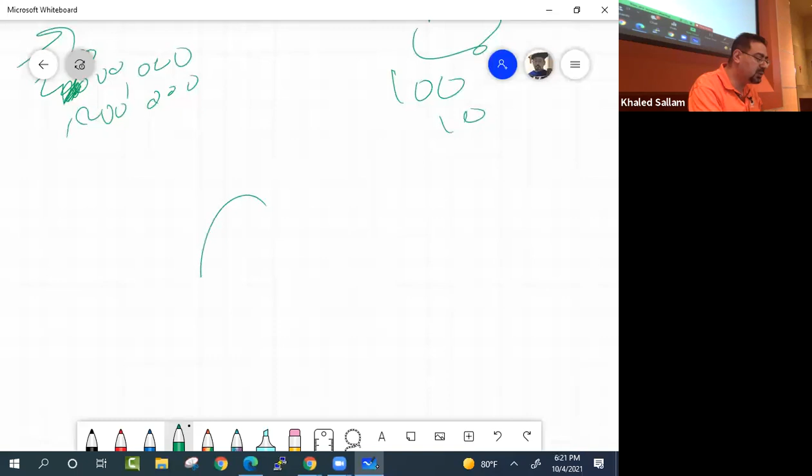So over here it's saying that sometimes when the wall is very thin, U-inside becomes just U-outside because the area-in and area-out are the same. Imagine a thin pipe - why is it a thin pipe? Because we don't want resistance for our heat transfer. So if this pipe is just dividing the two fluids, we will make it very thin, and then area-in and area-out will be almost the same.

Why would we make the pipe so thick? Only if... why would you ever make something like this? If the pressure here is so high compared to the pressure outside, maybe you would do something like this.

And that's why, if you take Energy Conversion next year, 4263, there is this power plant called the Ocean Thermal Energy Conversion plant, OTEC. For them to get energy from the thermal energy of the ocean, they need a very hot water and very cold water difference. The hot water is on top and the cold water is on the bottom, right? And then they send the refrigerant or whatever the working fluid between those two locations - one place is the boiler and the other place is the condenser.

And usually the refrigerant that will boil at ocean temperature, making steam or vapor so that we can turn the turbine, is kind of like propane or butane, some kind of fuel. And so it would require very high pressure to be able to boil and condense at those temperatures. So we are talking about like 7 bar and 9 bar, kind of.

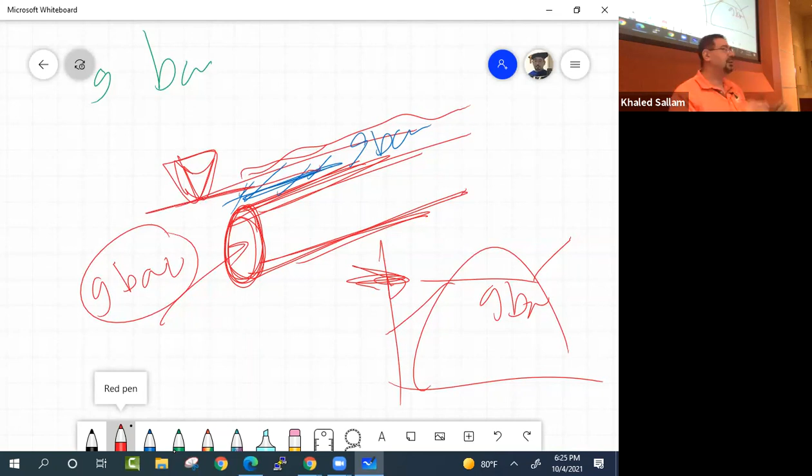That's not a big deal — go to 9 meters, and then over here there's a circulating pump that sends the hot water in. And so at 9 bar, your refrigerant can use a very thin foil, a plate heat exchanger, because it's 9 bar refrigerant, but the water on the other side is also 9 bar.

Okay, and the same thing for the condenser. So part of this Rankine cycle runs between 9 bar and 7 bar. The condenser uses very cold water coming from down where the sun never goes — that water will go up, how far up? 7 meters down.

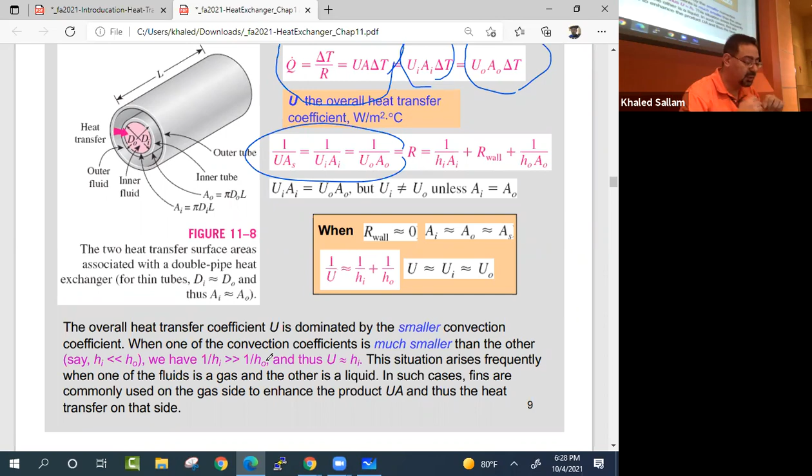Okay, I don't see any U over here. How do I get the U? They just give me the price, they give me the BTU, and they give me the area. How can I get my overall heat transfer coefficient?

Q is UA delta T. We know that delta T is based on this. When you're cooling 180 with 80, you'll be able to get your U, because you have the Q dot and the area. That table can be very useful, but the problem is it has a big range. It tells you if you have a water to water heat exchanger, your U is between 800 and 1700. So is it 1500 or 900? What is it? But at least it gives you the order of magnitude.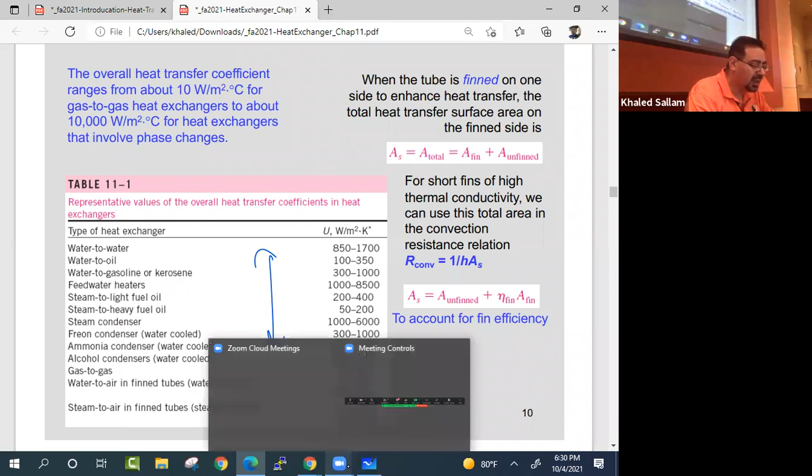So this is a typical number for the overall heat transfer coefficient. Notice that U has the same units as H, because 1 over UA is written the same way as 1 over HA. So what is the unit for H? Watt per meter squared Kelvin, right? Same as here, watt per meter squared Kelvin. And that Kelvin part reminds me of something I always get questioned about.

In this equation, UA delta T, students ask: should I use degree C or degree Kelvin when I calculate my delta T? It doesn't matter because you're doing subtraction, right? It's the same. So don't worry about the units here. This is the one exception to worrying about units. Otherwise, be scared of the units.

We talked about this earlier today, how we had the finned area and the surface area. The finned area is not all of it, the finned area is only the efficiency of it, right? So eta fin multiplied by A fin, depending on the geometry. Does the fin look like this, or is the fin really tall like this?

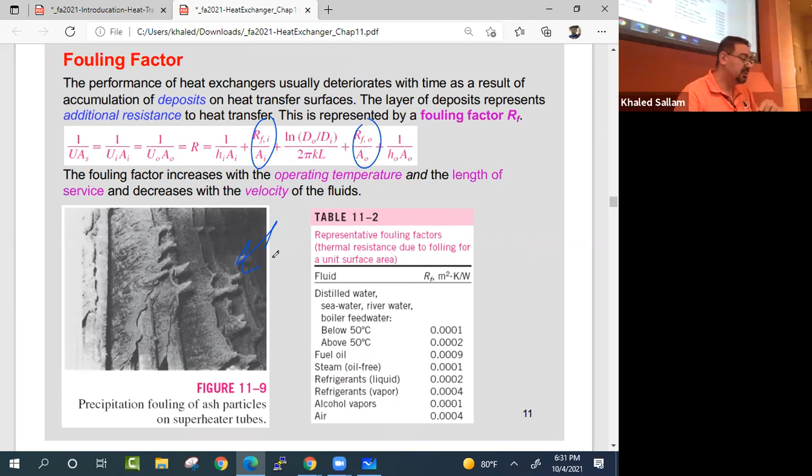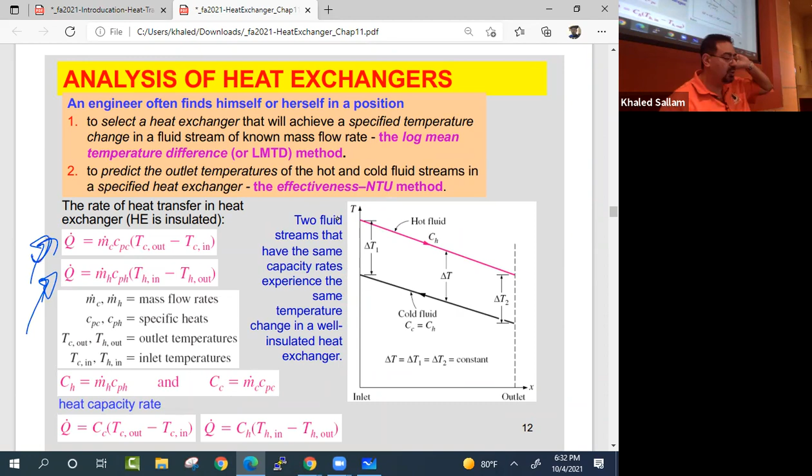This equation is not heat transfer, this is just thermo. And this equation is always correct, always true, no matter the configuration. What does this equation say? Q dot is m dot Cp delta T. It's basically how much joules you are. This is coming from what? First law - Q dot is m dot delta H. The delta H for compressed liquids is Cp delta T.

When we're on the TS diagram on this side, we call this the compressed liquid side. So you can calculate H1 and H2 if you know two properties. And even if you know only one property - what did I say in office hour last week? Sometimes the compressed table isn't generous, there aren't that many lines. Use the saturated value at the same pressure or temperature. So I want H1 - should I use HF at the same pressure, or HF at the same T1? P1 and T1 refer to this point. Should I use the same temperature, or the same pressure?

Same temperature, yes. And why would I remember this, or how could I not forget this? If you look at the TS diagram, you'll see - what am I plotting? Pressure lines. So I'm purposely trying to make them close together here, because that's how they actually are. If you look at the actual TS diagram, you'll see things that are really close together, on the surface.

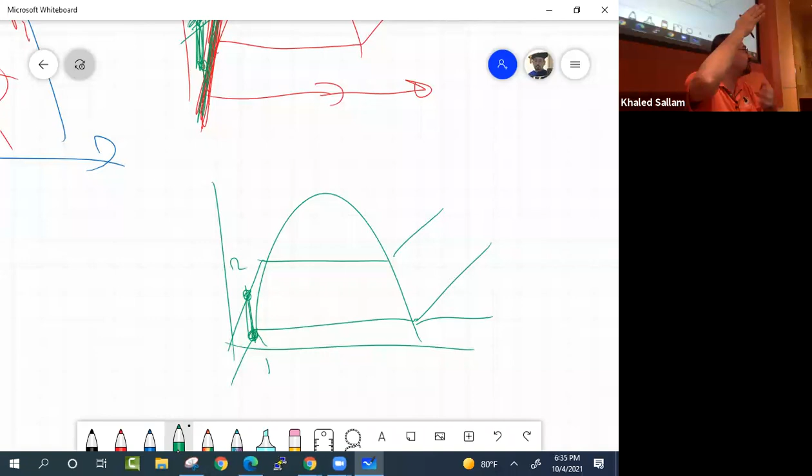I know that when I'm trying to make a sketch to show you the pump work, I do this - I say here is 1 and here is 2. I have to, because I want to show you how the line is on top and how it's isentropic pumping. But in real life, or in the actual TS diagram, this is how things will look - everything is here. So point 1 and point 2 would be like here, 1, and here is 2.

You get me? So this gets plotted basically like this. You plot everything, it gets plotted. Here is 1, here is 2, here is 3, here is 4, here is 5. That is the right way to plot them on an actual TS diagram. But if you want to make a sketch to explain to people how there is a pump, you know, you're trying to explain to the customer or to your students how pumping is happening, you basically have to do it like this. But if I say plot on an actual TS diagram and I give you the actual TS diagram, you have to put them all on that line. Does this make sense?

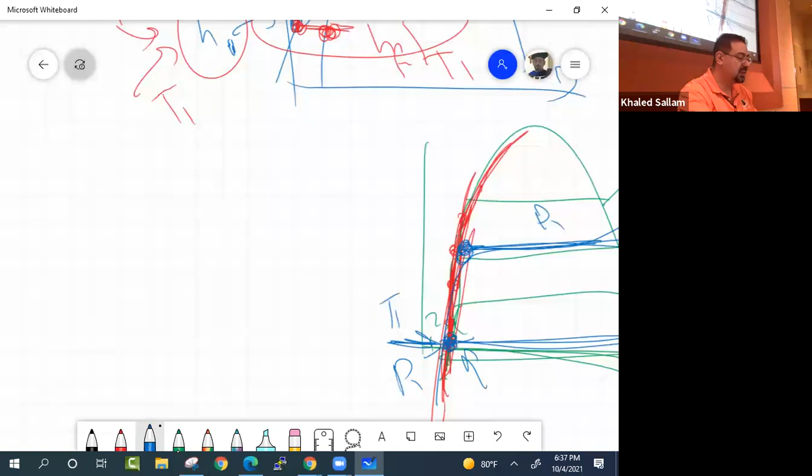Now, they have to be plotted on the place where they are. And that place, everything is here. So back to our discussion. If everything is on that line, it's obvious, if point 1 is here at P1, which say happens to be here, this is P1, right? And at T1, which is actually here, which point will have the same enthalpy like it? Of course, it's the one here, not this guy. Why would the guy all the way up have the same enthalpy? But the guy that I cannot tell apart because they are on the same point almost, that's the one. So that's why we can approximate the compressed liquid enthalpy by HF at T1.

So what are we saying? We are saying the enthalpy is a function of temperature only, not pressure. I mean, it is a function of pressure and temperature, but a very good approximation is that it's a function of temperature only. And therefore, I can really say it's C times delta T. So this, which you probably have seen in Thermo 1, is not a contradiction to the fact that we say H is H of P and T, right? This is the absolute truth, that H is a function of P and T, and go get your steam table or X-steam and enter your pressure and temperature, or pressure and entropy, or temperature and entropy, and get your enthalpy. But this is not that bad at all, especially...

And that is why we have to go to the steam table sometimes, especially that what? What? Especially what? What's wrong with the CP? Anything bad about the CP?

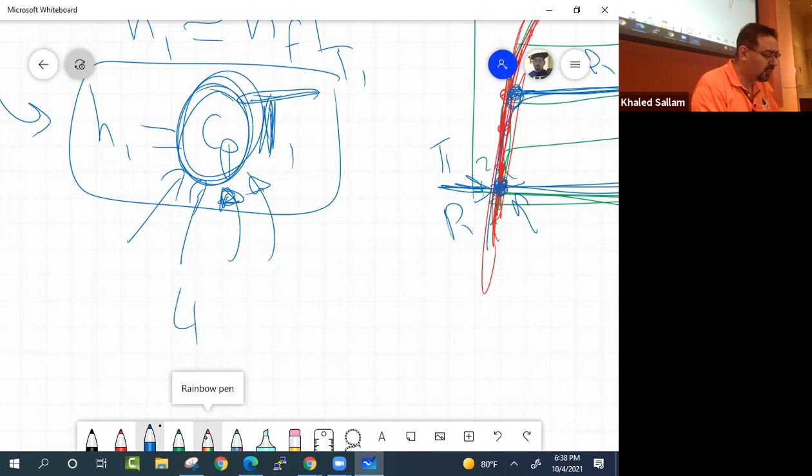It's not constant. The CP is a function of temperature. I thought the CP of water is 4186, that's what I memorized in high school even. 4186, right? Joule per kilogram Kelvin. Well, that is at room temperature. But when you start going up and down, that's why, what is your right CP for water, right? And so that's why it's more accurate to do this. And then the second level of accuracy is at least get the HF at the same temperature. So if you have the same temperature range, your CP will be pretty good, so the H is pretty good, right? And then the third option is to get a CP that is a good average in that range.

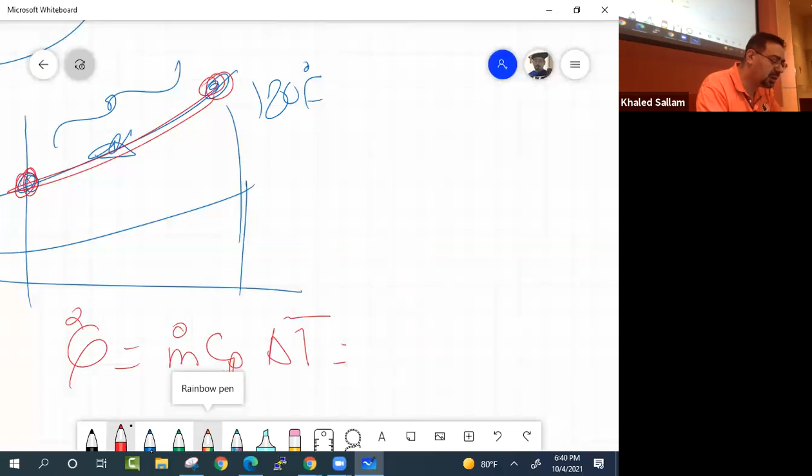But at the end of the day, whatever this guy lost, we can write it as M dot CP delta T, here's delta T. So if this was the hot fluid, then, and by the way, Q dot hot is the same as Q dot cold, right? Whatever this guy gains, this guy loses, assuming the air outside does not get anything, assuming the heat exchanger is really insulated, right?

So when you go to the HVAC lab in Stillwater, they had this big psychrometric chamber, and you see all the piping and stuff, you see them insulating the pipes like crazy. So much insulation because they don't want the measurements to go bad. They just want the hot and the cold fluid to basically only exchange heat with each other. They don't want anything that leaves to the outside, right? So M dot cold, CP cold, delta T cold equals M dot hot, CP hot, delta T hot. Okay.

So knowing T hot 1, T hot 2, M dot CP hot, and one of the temperatures, let's call it TC out, will immediately tell you the fourth one. So knowing 3 of those is good enough to get the fourth. You cannot just know 3 temperatures and stop there - if you know 3 temperatures, then you know the fourth. Make sense? But you can be in a situation where you know only 2 of them.

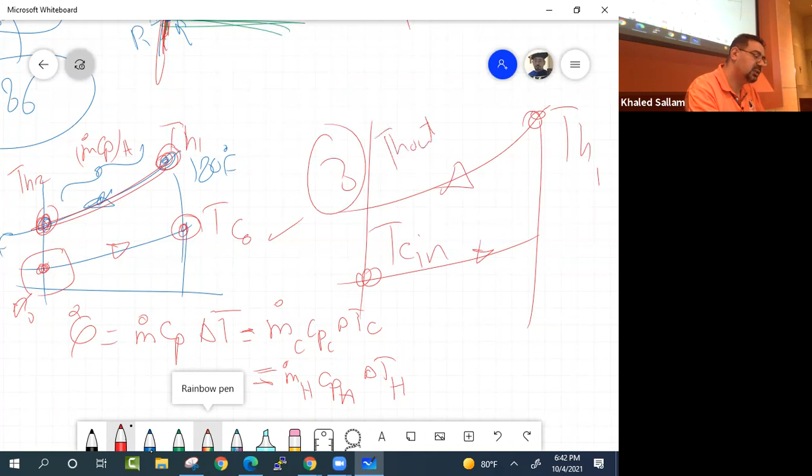Like, for example, you know T hot in and you know T cold in, but you don't know T hot out, and you don't know T cold out. So these 2 categories of problems determine whether you should use the logarithmic mean temperature difference or the effectiveness method.

If you know all 4 temperatures, or actually 3, that's as good as knowing 4 - you go for the logarithmic mean temperature difference. It becomes so easy if I know all the temperatures. But if I know only 2 temperatures and don't know the other 2, then I will use the effectiveness method.

Can I still use the logarithmic mean temperature difference if I know only 2 temperatures? Yes, but it will be trial and error - not infinite, but you have to do trial and error for it. So it makes sense to use the method that gives you the solution immediately, which would be the effectiveness method at this time.

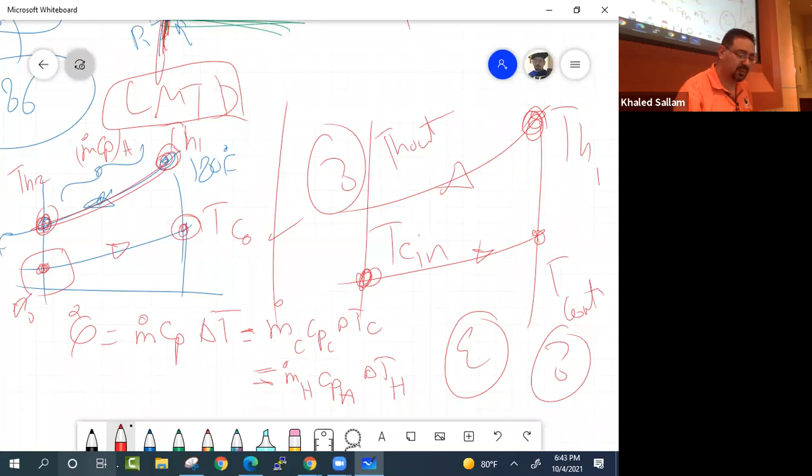Good. All right, so in the heat transfer book, they did something I would say really stupid. They multiply M dot and Cp together, and this new quantity they also call C. Out of all the letters in the Roman alphabet, you could have used anything else, but they end up using C for it. So then people get confused when they see that big C - is that the heat capacity rate or the Cp specific heat? Why did they use C?

But they did. What's even worse is you got CH and CC, C hot and C cold. M dot Cp cold is C cold, and M dot Cp hot is C hot. What's even sadder is they divide the two of them together, and that ratio between capital CH and capital CC, they call it CR. It's like a perfect conspiracy to confuse students - why not just call it D or R ratio or something?

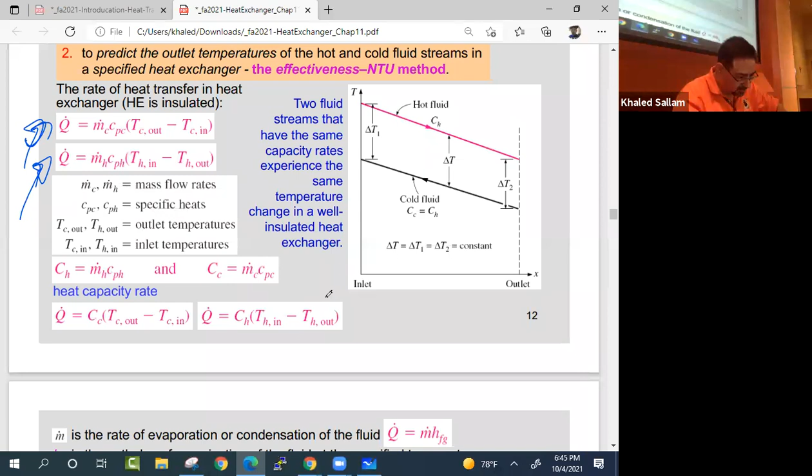Anyway, so we have to be smart, or at least alert. You cannot solve this problem half asleep because there are just too many C's in the problem. So we got Cp hot and Cp cold, that's the specific heat - the one where you'd say Q is M dot Cp delta T. And you got capital C, the heat capacity rate, and you can do that for the hot or the cold. Make sense?

So the only time when you cannot use Q dot equals M dot Cp delta T is this case. What is that case? How come one of the fluids is not changing its temperature? I see the hot dropping, but the cold is just constant. How is that possible?

And the same here, look at this - the cold is increasing its temperature, but the hot fluid is just staying the same. You keep giving him joules, and he doesn't want to go up in temperature. Why? How is he using all those joules? Where do all those joules go? I'm clearly giving him joules.

Yes, he's using that Q dot to turn his liquid into vapor - that is boiling. And the same thing over here, he's using all this Q dot H - sorry, Q dot C, which is M dot Cp delta T hot. He's using all that Q that is being sent to him to basically turn his liquid into vapor, so that happens at constant temperature.

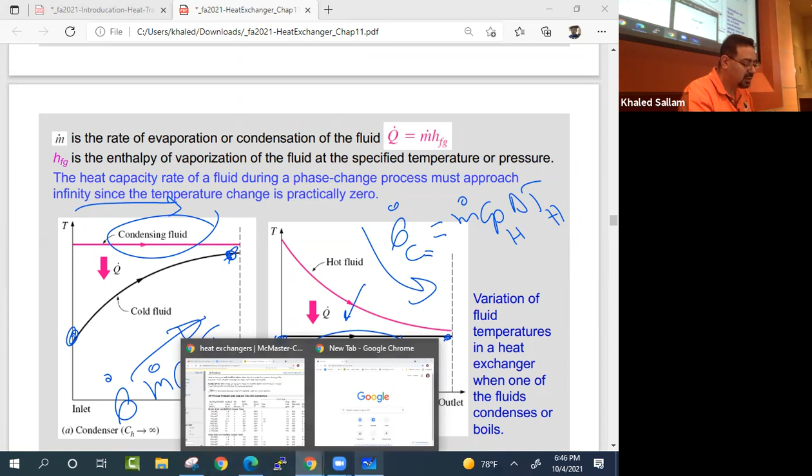So this is actually a very important point to make: when you are boiling a liquid, say by cooling hot gases - there are hot gases coming from the furnace, they come in here, and they are cooling. While doing what? While your water that you deliver to the boiler, it basically will stay at the same temperature. So if this was my heat exchanger, it's kind of a shell and tube heat exchanger where the fire goes into those pipes, and those pipes are sitting in a tank with water.

So there is water everywhere at high pressure around those pipes. That water will start bubbling on the tube that has fire inside, hot gases inside. And vapor will leave, but while this process is happening, the steam that's leaving cannot get hotter than T saturation.

Until it's all vapor, until it leaves the droplets behind, leaves the liquid behind. And now when it's just vapor by itself, if you have another heat exchanger or another tube, then that saturated vapor can start to become superheated, say with the incoming hot gases.

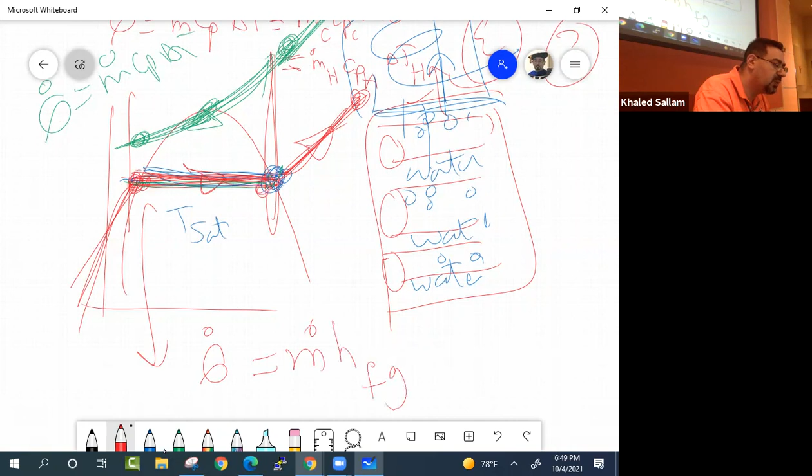So instead we use what? M dot HFG. See how? And then you can figure out how much M dot is being converted to steam from this equation. So the whole Q is turned into M dot HFG. And that also gets applied to, say, melting. If you have solid that turns into liquid, you have to do this.